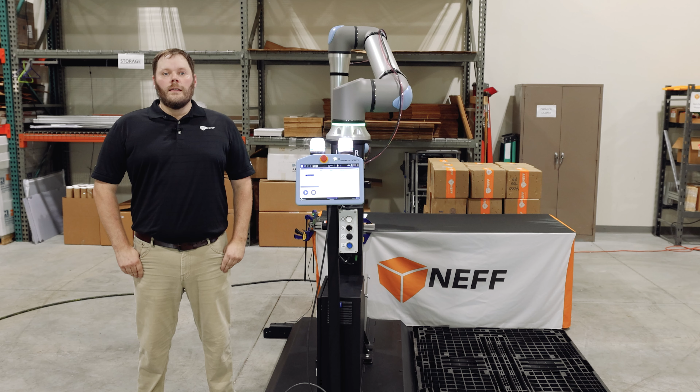We're here today to show you the Robotiq PE20 Palletizer. This palletizer has a payload capacity of 20 kilograms. Let's jump into setting up a typical palletizer node.

Starting with an empty program, we're going to expand the URCaps on the left. We're going to add a palletizer node and hit start.

First step would be selecting our units. We're going to go with Imperial.

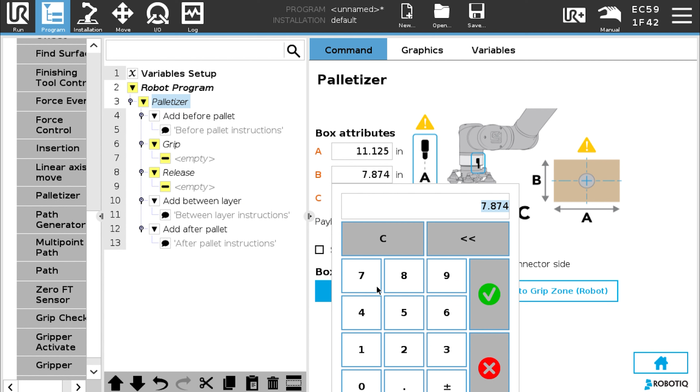Next is defining our box size. Our box is 11.125 by 14 and a quarter by 9 inches, and a weight of a quarter pound.

Here's where we can set the orientation of our label. Pay attention to the tool connector on the robot to set the right orientation. We're going to set ours to the right-hand side so that our labels will be pointing to the outside of the pallet. We'll set that in the pattern next.

Next is setting the grip position. Select the button here for set grip position. Now jog the robot to the center of the box, and once you've got it there, select OK.

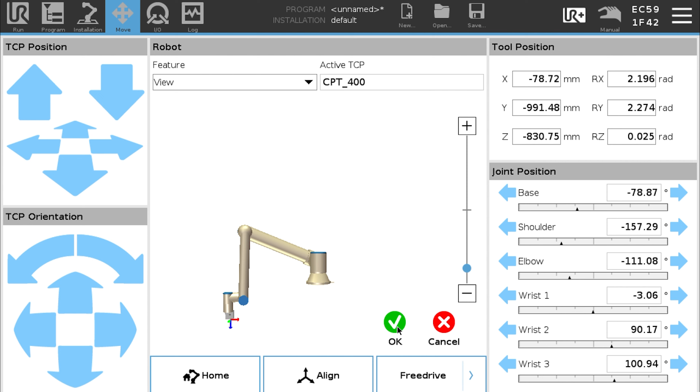Now we've got our box dimensions in, we've got the weight, we've got the grip position set. We're going to go back to home and we're going to define our pallet.

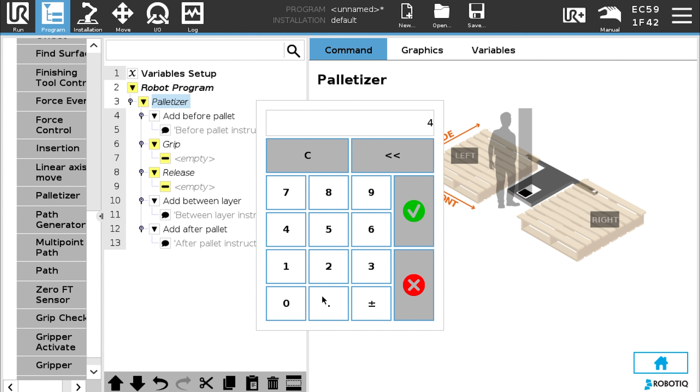Our pallet is 41 by 47 by 4.875, and we're going to be doing the right-hand side.

Next we set our pattern. Hit Edit on Pattern 1. Select Add Box, and here's where you can choose to have snapping or movement steps.

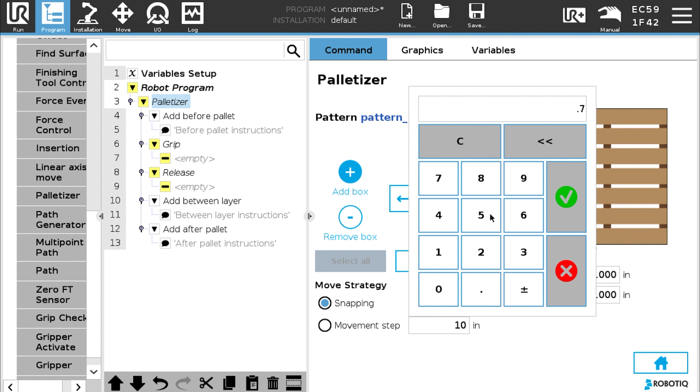So now when you click left or right or up or down, it moves it by that much. You can also do snapping, which will just shoot it to the next open spot, whether that be the edge of the pallet or the next box.

I like to put a little bit of space between each box because you'll never grip it perfectly.

Notice that I'm putting the arrows pointing outward. That's so that the labels will be pointing outward on the pallet. This one's facing the wrong way.

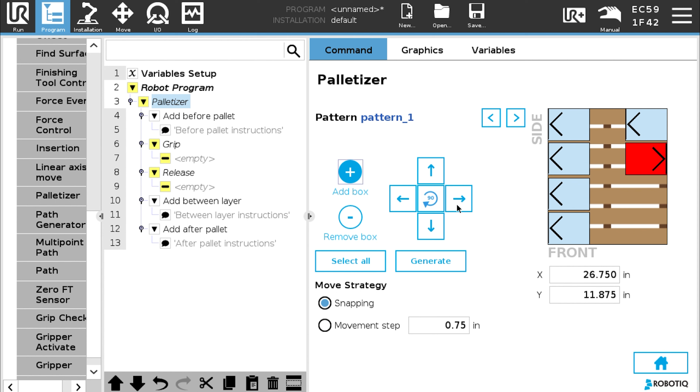Down that one, down that one. And then over, down.

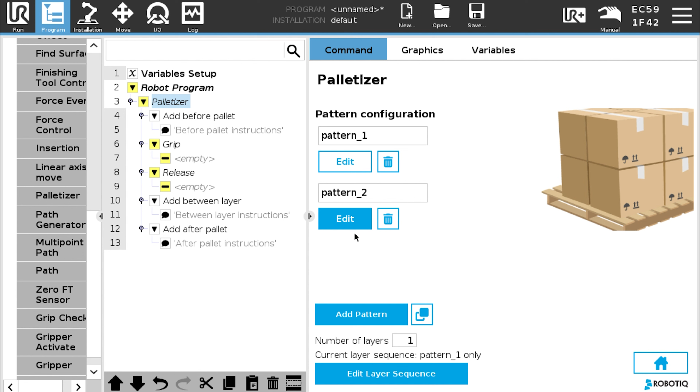So there's one layer. For pattern 2, we're going to try using the auto generator. Looks pretty good, but I'm going to add just a little bit of spacing between these.

And there we go, we've got 2 patterns set. Next we set our sequence.

We're going to have 2 layers in this example. Hit Edit Layer Sequence, and for this one, we'll alternate from 1 and 2. We'll start with 1, end with 2.

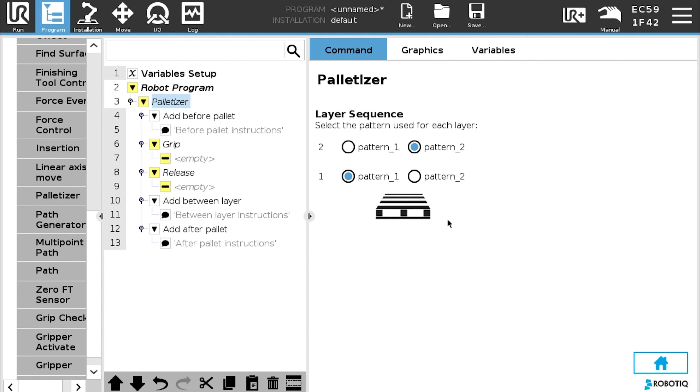Head back home. And that's the end of setting up the box, the pallet, and the pattern.

Next we have to tell it how to grip the box. We're going to go to the grip command or grip section of the palletizing node, and we're going to add a set command.

Here's where we're going to set the output for our gripper. And then for release, we're going to do the same thing except turning it off.

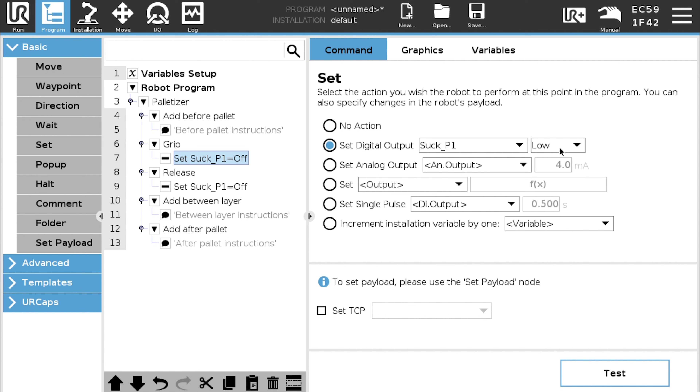Now that we've got it completed, we're going to go up top here and change it to automatic. Then hit play.

It's going to ask us the current state of our pallet. We have no boxes on our pallet right now, so this is good.

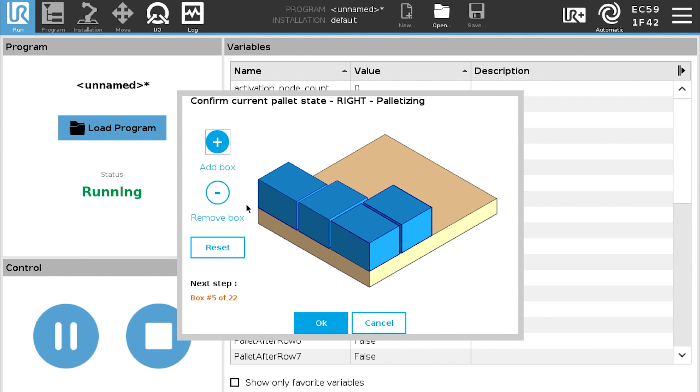Had we had an issue with our program running, we can add boxes here. Let's say it stopped here and you had an issue, you can go in here and tell it where it's at. If this box had an issue, you can remove one, or for our case, it's empty.